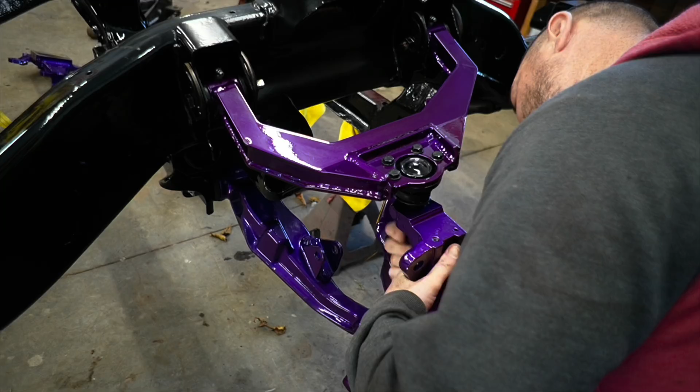So this will be the last thing that I need to do to this truck before we are completely set. We can get this thing on the road, drive it normally. And what I'm about to show you is completely out of my ability to do in the garage.

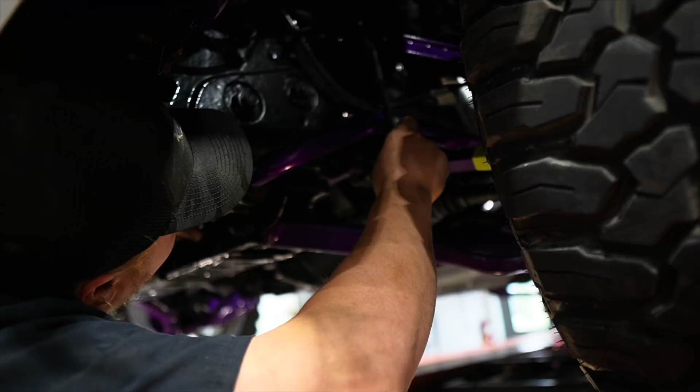In today's video, I'm gonna give you guys an exclusive look on what it's like to professionally align offset wheels on a truck, what it actually takes and why it's so costly. After building this truck in the garage, I tried my best to get the alignment on these tires perfectly straight, but it's impossible. Unfortunately, when I drive the truck, the steering wheel is actually at a 90-degree angle, almost like flipped upside down. And I know what some of you guys are gonna say, the stupid chrome offset wheels, I think they're -76 or something like that. They're very wide.

Here's some old shots of my wife and her first reaction when we put those wheels on the truck. So check this out real quick.

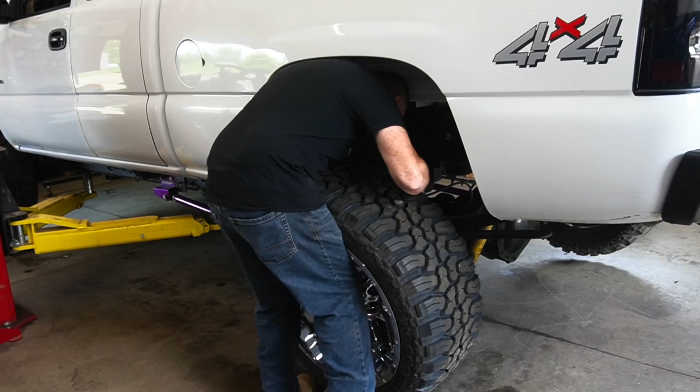Yeah, I don't know, I feel like that's more of the real truck look. Real truck, it's like bro wheels. She's not digging it, y'all. I told you, I don't need anything different. Then you're gonna steal my truck and drive it somewhere and have fun, right? Like something I would drive? It looks amazing. Yes, it does. It matches you very well.

Okay, the chrome looks good. Okay, all right, we get something here. I don't like the purple lug nuts at all. That's not a problem, we can always change that out. I think they're cool, I like how the purple reflects off the chrome, I think it looks pretty cool. Yeah, she's warming up to it, guys. The chrome looks nice, I don't like the lug nuts at all, though.

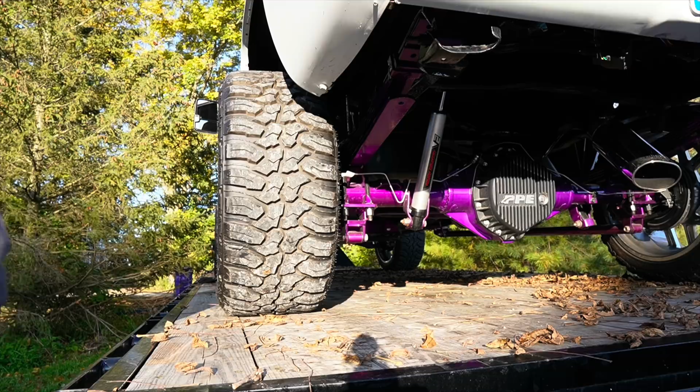All right guys, so I'm here at A&D Repair in Haslett, Michigan, not too far away from me, and these guys have nailed it every single time. I've actually had 3 trucks with wide offset wheels, just like the LifeMax over here. This is David, by the way, say hi. Hello. David's actually gonna be aligning this monster. I don't even know how you guys got that thing on the hoist. They're like -72 offset, tight fit, but it fits.

And this is Roy, what do you do? I'm COO with A&D Repair. Awesome, and what do you guys do here? We do a little bit of everything. We work on everything from compact vehicles to full-size Class A motorhomes. We do collision work and repair work for both of those. And I also noticed you had a body shop outside. Yeah, for sure, we have a body shop right next door. We have about 12 service bays over there. We have full-size paint booths where we can paint anything from a small vehicle all the way up to a 53-foot tractor trailer.

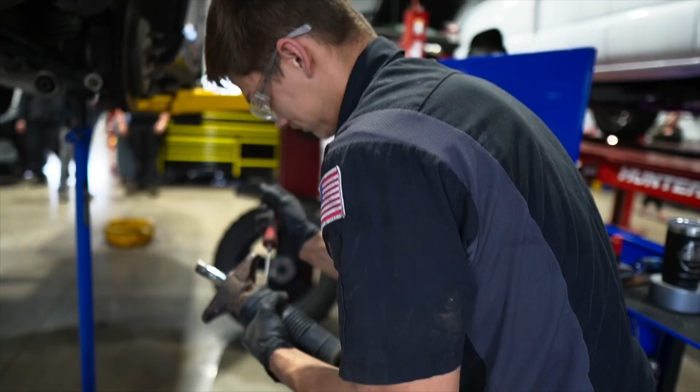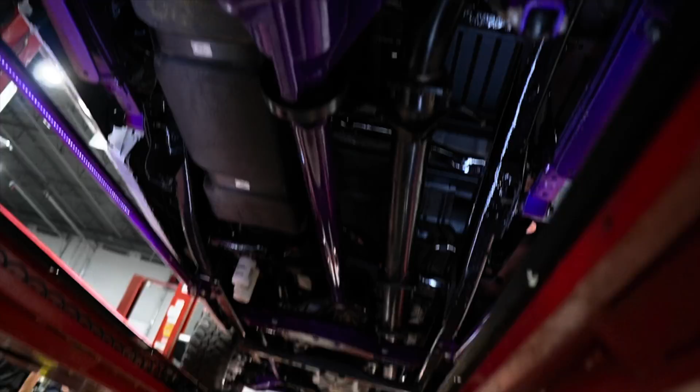But without further ado, let's go ahead and talk about this LifeMax truck, the wide offset wheels, and how we're gonna dial her in, because right now it's not very desirable to drive. So he's setting up the hoist right now, just getting everything dialed in before we actually get going. However, he has been doing an inspection on the vehicle as well, just kind of looking over some of my shoddy work. He did find a few things, nothing really much major to talk about.

I can fix it on my own. The exhaust hangers are a little too close to the frame and things like that, which I can easily fix. I already know about that.

But as we continue on here, as he's looking at everything, we're gonna show you guys exactly how we align this thing. For some of you guys running these big stupid offset wheels trying to figure out how to start this process, you probably could do it from home with a tape measure, but you're not gonna get it right. So pretty much what we do is bring the vehicle on and get it as straight as possible on the alignment rack, because we want to see all 4 tires from our laser heads up here.

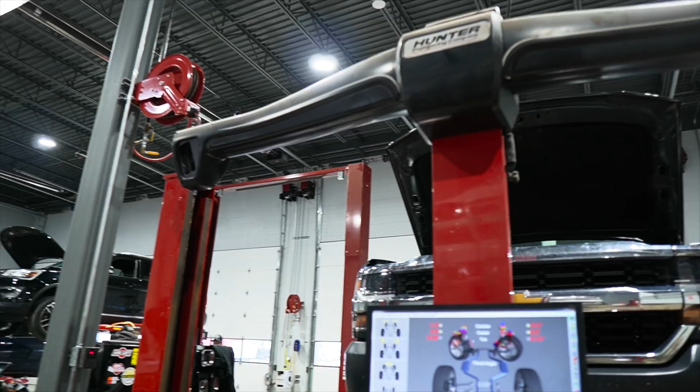So when we get it rolled on, up to right before the turning plates where your front tires go, we get our alignment heads that go on the wheels, and our spacers for deep dish tires. We get them centered to the wheel, right before where we roll it, and get the heads to read. Once it reads, we run through our caster sweep, where we steer the wheel one direction then the other, and it'll read where your caster's at. It'll determine how far off your toe is and what your caster and camber are reading.

Now, realistically, how close can we get this old girl? I believe I can get it right on the money. Really? Right on the money. Wow, that's incredible. Now, as of right now, what are your thoughts?

I kind of put this together blind. I know the steering wheel's a little crooked. Yeah, well, that's a given when you do any sort of lift normally. Normally you roll it on, get your steering wheel wherever level is to you, wherever you feel comfortable. I always want it right on the money. I don't ever want to let a vehicle leave that is not within spec.

And David, there was another thing - I don't know if you test drove it yet, but this truck is so loud, and it's not the engine, it's the tires. It sings, man. After this I'm gonna take it on a test drive, and I'm hoping it's gonna be a lot quieter, which I'm sure it will, and it's more room for more horsepower, right? Absolutely, it's not gonna be pulling us back.

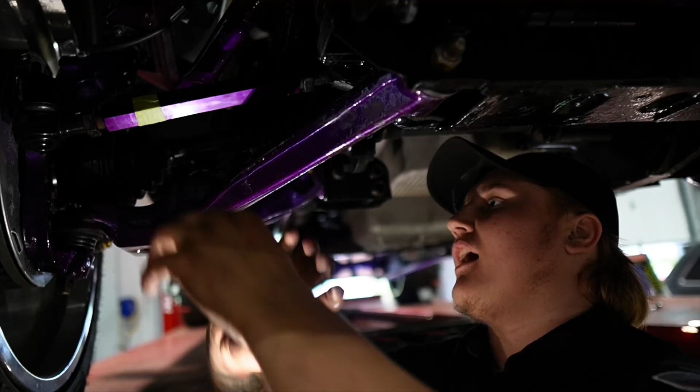Oh yes, absolutely. All right, so right now I am adjusting your passenger front tie rod. We're gonna be adjusting the wheel so it's pointing straight, as right now we have the steering wheel pointed straight, as where we started it was at a 90-degree angle to the right. Was it really? Absolutely. Wow.

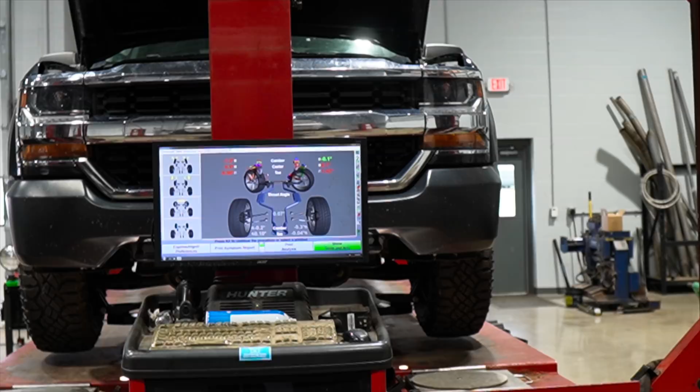I was way off. Now, is it possible to do this with a tape measure on the floor? Actually, yeah, it is. As long as you have a stationary spot that you measure from, say your Chevrolet emblem in the front, you could measure from the center of it out to, say, the outer edge of the tire, and measure out whatever reading you get to the other side - roughly what you want it to look like.

Now, as for keeping the wheel as straight as possible within spec, that would be a little bit of a doozy. If you could find a measurement on, say, a Chevrolet forum that would give you the right length you need, maybe you could run it that way. But with aftermarket wheels and tires, it'd be a bit harder, but I don't think it'd be too hard. It's possible - you won't get it right to where you want it, but at least you'll get it close. You'll definitely get it close.

And you also put a little bit of tape on those kryptonite tie rods. Oh yeah, because I love the powder coat, man. I don't want to scratch it up.

Luckily it's really clean, no rust, so I don't have to use a wrench, I can just use my hands. That's a treat for you. This is mostly what we're dealing with—the rockers, corners, the boxes, stuff like that.

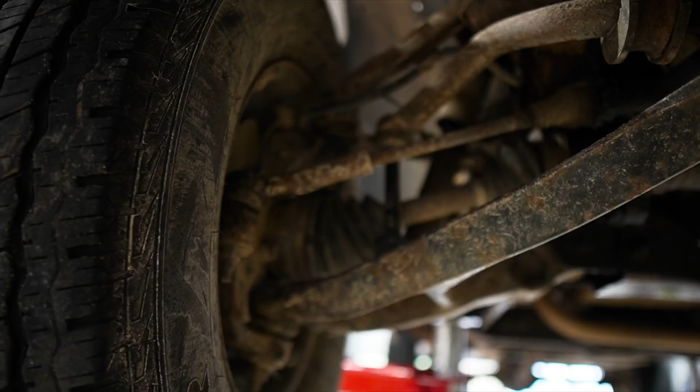If he was going to do an alignment on this truck, as you guys can tell, it'd be a little more challenging just because of the rust.

Hey, if I was to stand in the way of that laser, would it mess it up? Actually, it wouldn't. It's very intelligent, it'll pick up a person. Say I come over here and block his head—right now you won't get a reading from the left side, but you'll also get a reading on the right side, so it'll always use at least one of the heads and make sure nothing moved too much. As long as you don't shift anything while it doesn't see, it's always usually right on.

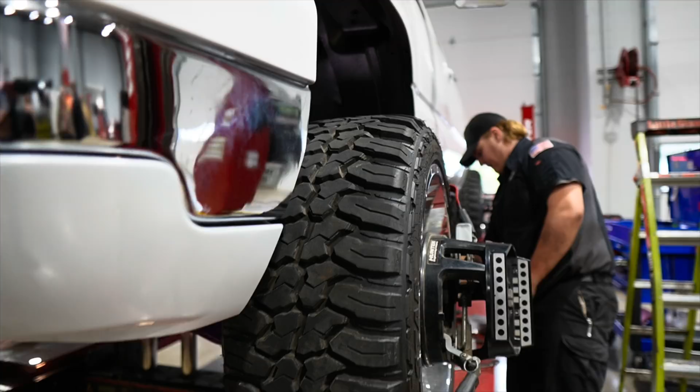And these are the new nuts over here, I would assume? Yep. So we're about 2 hours in, guys, because things just aren't working the way they should. It's not their fault, it's actually kind of my fault—it's kind of the bolt's fault. Well, I can show you now.

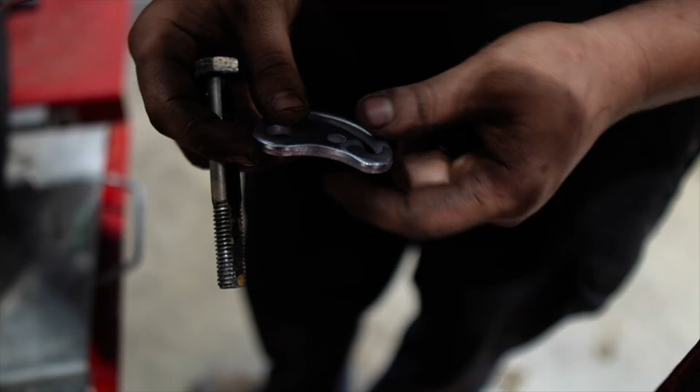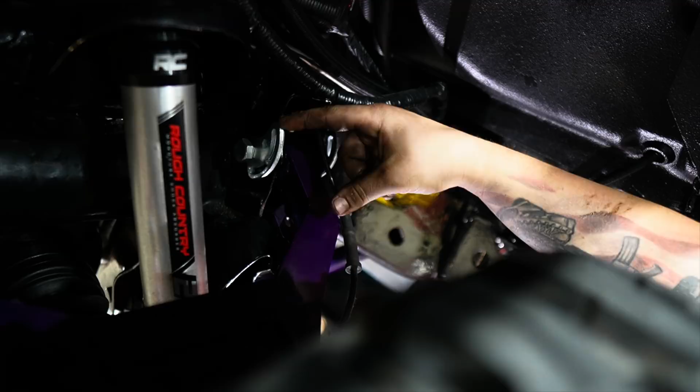So pretty much how these work is you have these special bolts with one side completely flat, and when you install them, they're supposed to go flat side like that. So when it's in the vehicle and you turn this nut, it turns that cam, and there are little pins in here that the cam sits on. As you turn that bolt, it rides on that pin and moves this bushing in and out, which adjusts your camber and caster. So what happened was this old one either had too much tension on it or just failed in general.

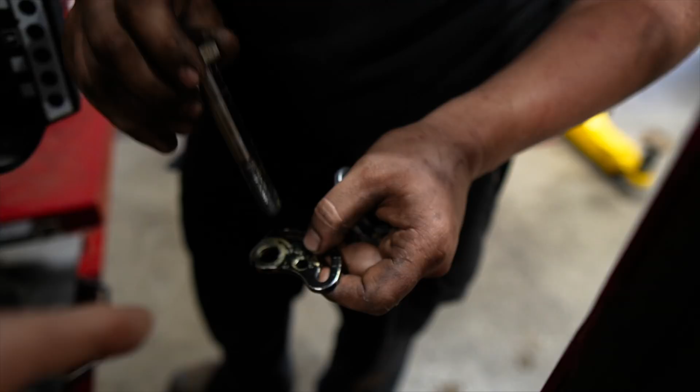And actually, these are used. Yeah, these came from the original build—when I was pulling sleds, those were on the upper control arms. All right, well that too, yeah.

Any sort of unwanted movement it had just rounded it out. So as I was turning, I was getting all this slop, and it eventually rolled right over and stopped moving in general. Every time I tried to turn that bolt to get your camber and caster within spec, it just kept turning like this. So you were getting nothing out of it. Yeah, I wasn't getting any adjustment.

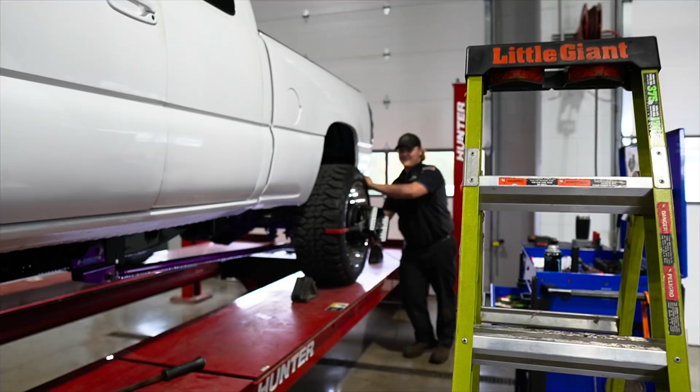So we throw these new bolts and cams on there, we should be able to move it finally and get some adjustment out of them. Since we did so much movement and changing that camber caster bolt, we want to re-roll the vehicle so the suspension will settle, since obviously I moved it. Right now we want to get a correct reading every time we get something changed out or moved.

That's a lot of playing around, dude. Oh yeah, it can be a lot of work sometimes—sometimes when they don't want to work, or when you get a rustier Michigan vehicle, you get those camber caster bolts that just tend to break. This job, rust can turn into $1,000. Oh, it could. I have seen a lot turn into a lot of money.

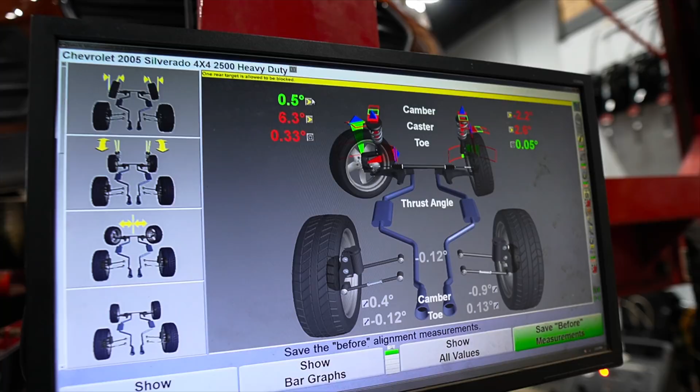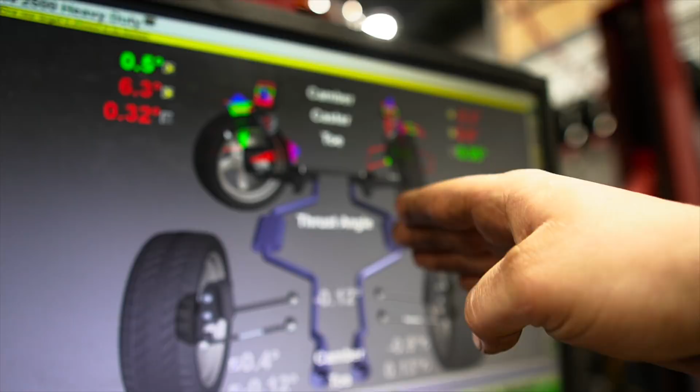So right here we have your camber, your caster, and your toe. Your camber adjusts how far in and out your wheel tilts—so if you're sitting in the vehicle, your wheel camber-wise is going to tilt like this. Right now what we want is the manufacturer's specification of 0.3 positive degrees of camber, so we're going to adjust this 0.2 degrees less than what it is. This side, we need to adjust a little bit more.

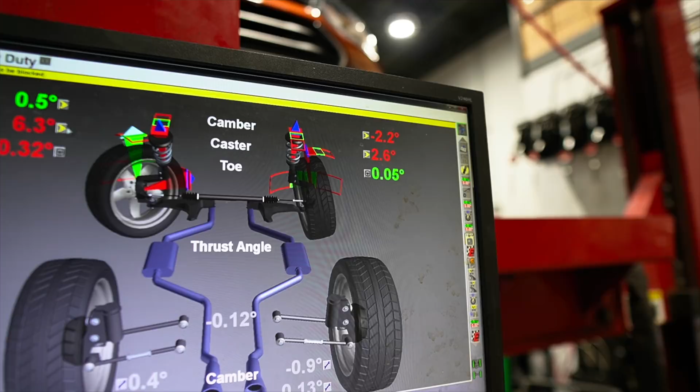With our caster, our vehicle specification will be 4.3 degrees of positive caster. But usually with lifted vehicles, we tend to have to be a little bit out of range with our caster, though we really want to focus on our camber and our toe. I know you were asking about the computer specifications.

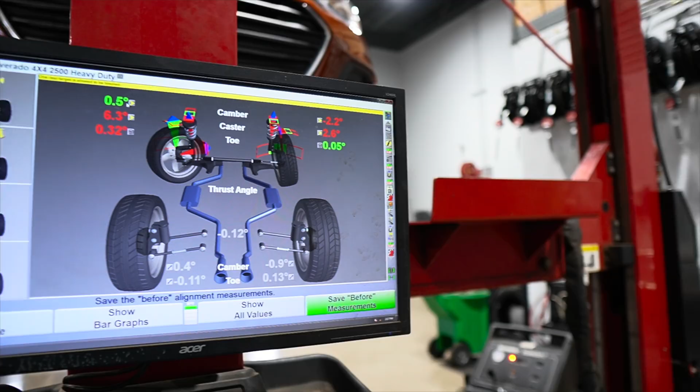Is it going off the crown of the road as well? Because I know the crown kind of pitches in the road. That's where, as a technician, you got to understand that sometimes the crown of the road will affect it, and usually you can adjust for the crown of the road. You first do your alignment, get it within factory specs, then as soon as you go out for your test drive, if your vehicle tends to pull to the right because the crown of the road has a hump in the center, you can bring it back on the alignment rack and make some adjustments, say make your camber lean a little more against the road crown, and usually you can get it straightened out and start driving straight.

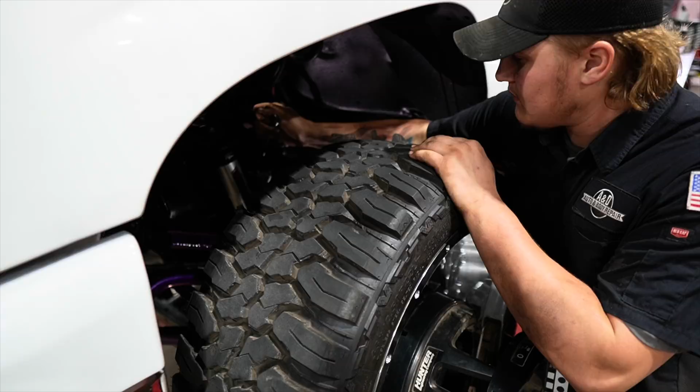That's good to know. There we go.

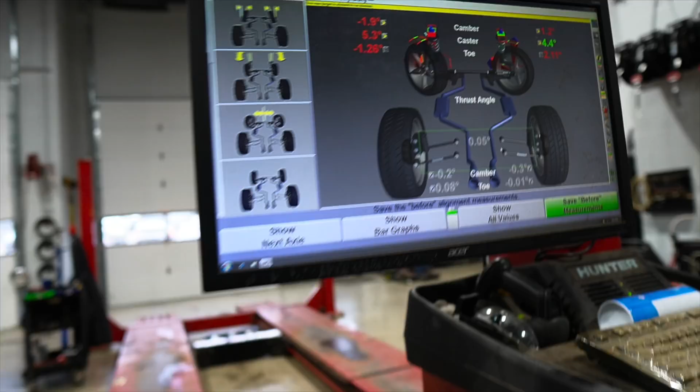Caster's 4.3. So what do you think, boss? Well, we're still a little off on caster. Camber, we just got done adjusting, but after we did the rolling compensation, camber's off again. So I think we should try one more time on that side.

Caster side stayed, turn it. It's wanting to fight that cam and try to run. I think we're about 4 hours in on this alignment. I'm not joking, it's taking us a tremendous amount of time. For some reason I thought this would be a simple process, but you know how anything goes. You think you have all new parts, you think things are going to go the way you want, but to be honest, I think we're on the right track at this point.

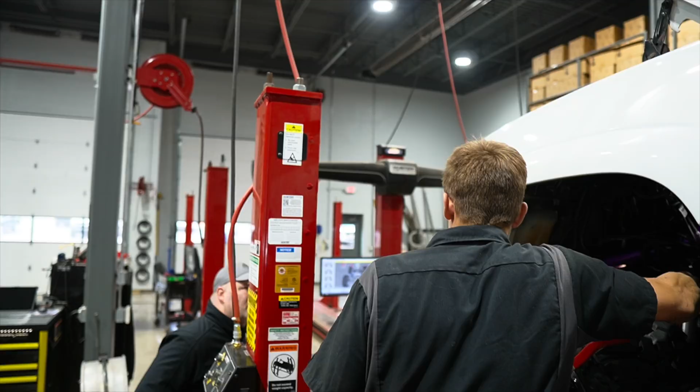Oh, we're definitely on the right track. We know where we got to go, it's just a matter of getting there. We'll get there, I have hope. We have hope, absolutely, no, we'll get there one way or another. Hey, we could even take an air hammer to it. I'm just kidding, nah, we don't go that far. No, okay, I would, Earl would. No, right, for sure, no, we'll get there one way or another.

I gotta be really honest with you guys, this is a big shocker to me. I didn't realize they were that rounded out. You had to get new cams because these are rounded out, and like you were saying, they're just spinning in there. Dude, what is going on? Maybe it was just the impact, just driving it in nice and tight, maybe I walked it out. I don't know, but I've never seen that before. It's interesting.

Did we get it? Not yet, but we finally got the swing that we were looking for. Was it when you nudged it when it went down? Yeah, so when we were lowering the lift, it kind of fell into place a little bit. Nice, so we're getting closer. Yeah, whatever way you're going is good.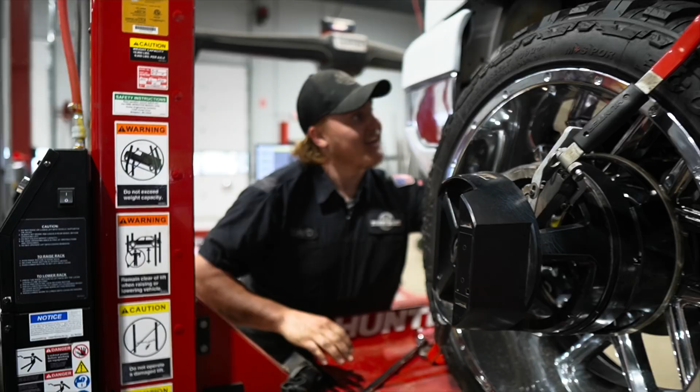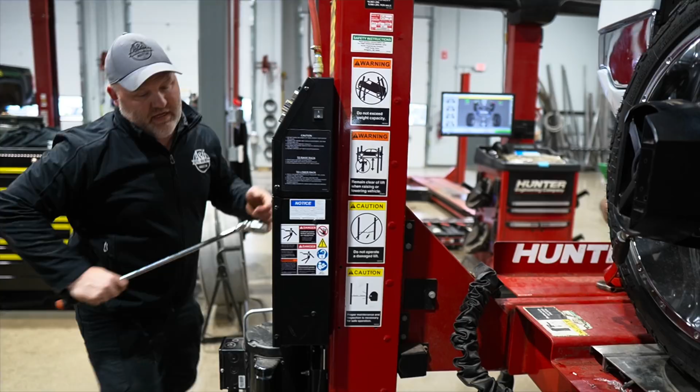Dude, I don't care, tighten it right now, go ahead, tighten it right now. But if I move, I'm loosening. Hold on, run, need you to tighten those bolts. Tighten Trevor's first, both those bolts. Both of them? Yep. The sensor, real quick, just so I can see. Roy. Oh, my bad, good. A little more, a little more. Oh man, you might have to loosen it just a little bit. Right there, go ahead, go ahead, tighten. I'm not as tall as you boys. Go ahead, you're gonna have to tighten it, you're gonna have to finish tightening it from there.

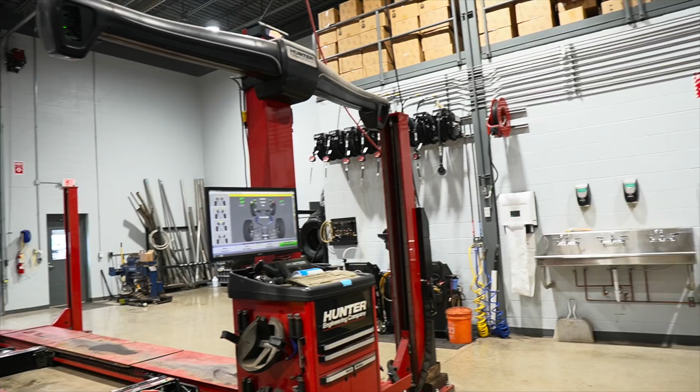Oh sure, so did it help? Did it get close? Tremendously did. Nice, it is well within spec. And we'll see if we can match the other side as close as we can. The other side should be a little easier. Should be a little easier. I'm thinking so too.

All right fellas, so we just adjusted pretty much, and now we're seeing a lot of green. Green means good, right? Yes, it means gooder, almost perfectly within spec, but we gotta roll, we gotta make a rolling compensation to make sure it's still accurate. So you gotta roll it, push it backwards, bring it forward.

Can we do a rolling burnout on the hoist actually? We could theoretically, it's up to that big guy over there, he might like it. Can we do a rolling burnout on the 4-post?

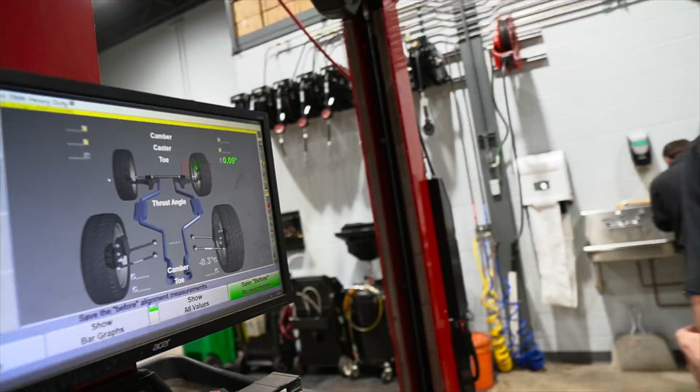Maybe we should recompensate one more time now, just to make sure, because with us just moving the tires and everything, now we've got the total toe overcompensated.

The toe can easily be fixed, it's the camber and caster we're worried about. So I guess you want to roll it and recompensate just to make sure. Yeah, I suppose so, and then that'll prove our specs there, so we get the same results. Okay, let's redo it one more time.

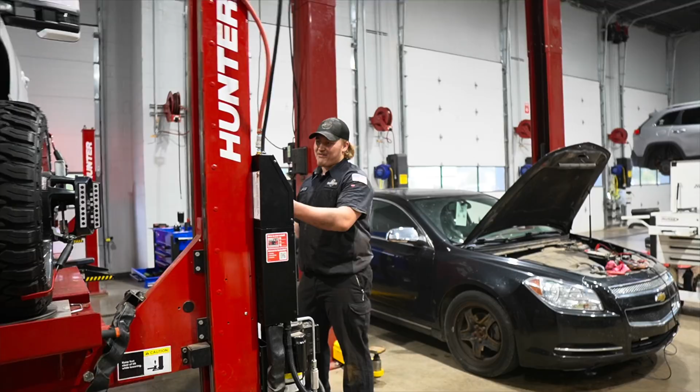Was this the worst alignment you guys have ever done? No, I think me and him spent like a week on a truck, took us forever. Oh my gosh, it took us forever. Remember that red Ford we worked on? That was, oh my god, it's a straight axle, so you have to have the eccentric adjuster on top, so you have to do different angles to get your different degrees.

So you have to take the wheel off, pop it out, put it back in, put the wheel back on, recompensate everything. Was this an F250? I think so, yeah, I think it was like a 2013.

I'm telling you guys, I'd much rather work on IFS. I'm not saying it's better than straight axle, I feel ya, but at the same time it's smaller pieces and easier to work with. The brake pedal depressor.

About level. So they're gonna roll it back and then roll it forward and see where they're at. That's kind of the goal here.

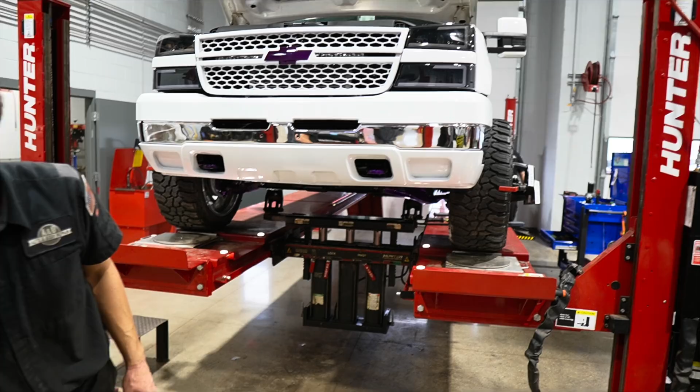Man, we're not seeing that left rear target. Left rear? Yeah. There we go. I'm gonna restart one more time, one sec. Okay, come on forward. Perfect, right there.

So that's kind of what we figured, yeah. So total toe, I guess go ahead and adjust that total toe again. Since we did the camber and caster, it knocked our total toe way out of spec. So now in the rolling compensation, we have to make sure the total toe is at least within a reasonable amount to make sure the alignment heads get an accurate reading.

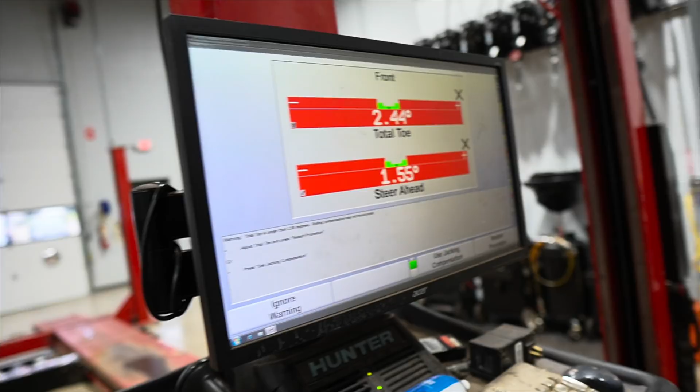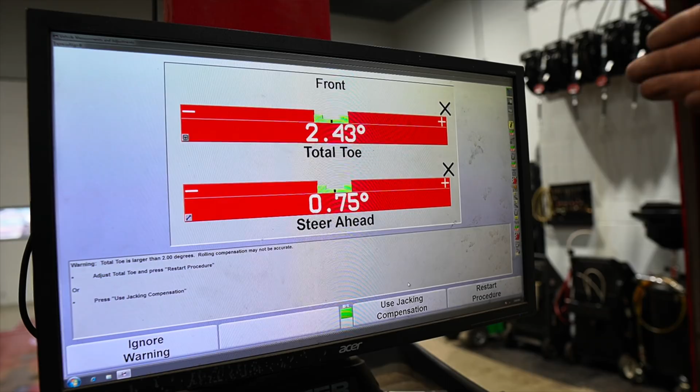And we're really looking for it to be as close as possible for total toe right here. So total toe is the difference between your tires, out versus in. So if you're toed way out, your total toe is gonna be way off, and in order to make an accurate reading, it wants the toe closer. So we're gonna get that total toe as close as we can get to straight in the middle, and then we'll readjust one more time.

Turn down the heat in here. I'm too fat, one or the other.

It was way out of spec after we got the camber and caster in spec, so we had to get it closer. But camber and caster, are we good on that? No, that's what we're trying to do right now, trying to see it. We gotta roll it again one more time because we just did the total toe adjustment. Only if the camber and caster are perfectly within spec, all we've gotta do is toe and go drive it.

Sweet, these tie rods, we just gotta adjust those and that's it. And we'll do a 4-wheel drive boost launch and crash into a tree. You can do it. I'm honestly too scared to do anything with this truck. All right, yeah, I haven't put her to the floor yet.

Come forward. Well, obviously just a little alignment. A moment of truth, gentlemen. Okay Lee, block it. I'm trying not to stand in front of their sensor, that's why I'm standing so far away.

Again, dang it, I think we keep moving every time we recompensate. We keep moving it. It is super close. David, I think if we just adjust it a little bit.

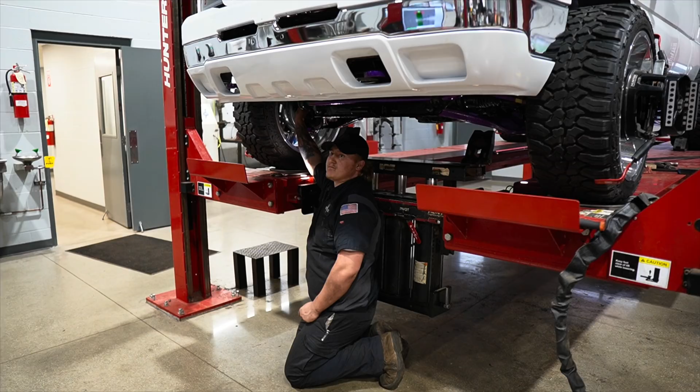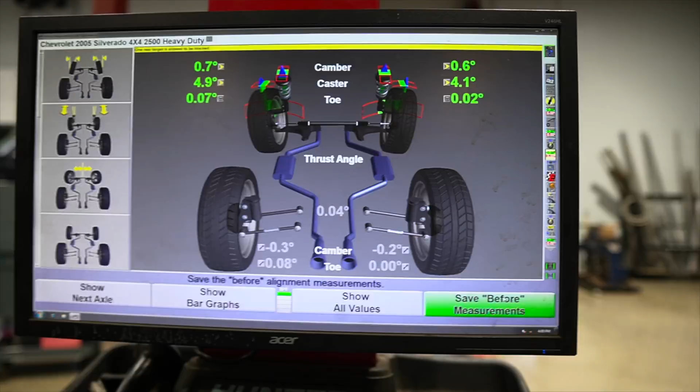Wow, you're dead on it. Nice job, boys. Green, we're good. Just a tiny bit outside spec, but really good. Awesome, good job.

So we've been at this for about 6 hours now. It's okay, though. Part of doing the job is doing it right. That's right, absolutely. We don't need no crazy redneck girls in here. We do this right.

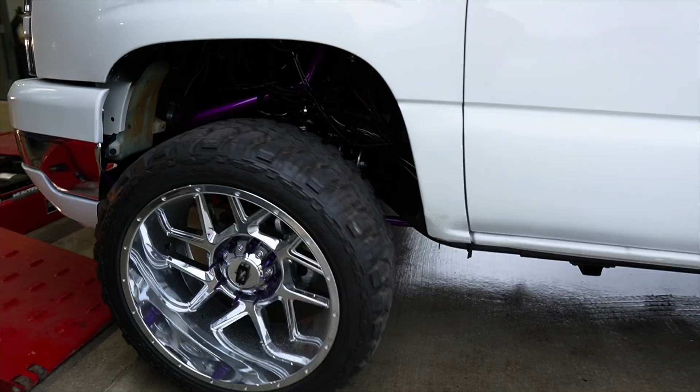All right, steering wheel's actually straight. Look at that, it's a miracle.

If you guys decide to go this route where you're getting the big crazy wheels, big mud tires, even a lift kit, and you expect it to ride perfectly, it's not going to work out for you. I've never been able to run that. I don't think I've ever been in a lifted truck that actually was able to go straight down the road exactly perfect, ever.

I'm actually really impressed how smooth this rides. I don't really know how much of a lift it's on right now. There's no lift, it's stock. It still rides very smooth, but I do have the torsion keys kicked up a little bit. I still can't even tell.

Nice, that's awesome. This is the first time the truck has seen rain, actually, after the paint job and the powder coat. It's not going to affect anything, but...

Them tires are loud, though. I know, they sing.

Again, thank you so much for having me. Yeah, absolutely, thank you for joining us today. The guys nailed it. Yeah, it was awesome. It was obviously a challenge, but hey, a win's a win, man. All right, hopefully we'll see you again on the channel. For sure, brother, I appreciate you. Awesome, thank you so much. Take care, brother.

The job took us hours to complete, as I thought, but it was definitely worth it. I'm glad they were able to dial it in with that Hunter alignment rack because it has lasers and stuff - it takes all the guesswork out of knowing exactly what's going on. But I gotta be honest, it's really nice to drive this thing knowing the truck's going straight down the road and I'm not chewing up these tires.